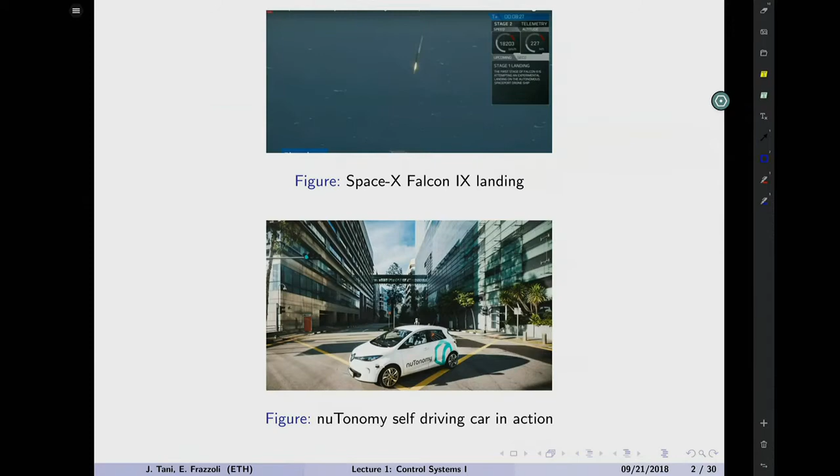So, what is Control Systems? Why is it important? Why is it amazing from my perspective? These are all things we're going to discuss throughout the course. I'd like to start with two simple videos to show what control systems is all about. Up to now you've studied math, physics, building bridges, or figuring out practical stuff where it was very clear what you were doing. Control systems typically isn't always appreciated because it's a bit more subtle. So let's see what control systems allows us to do.

And for deep space exploration tomorrow. What you can see here is pretty straightforward: it's a rocket launching, which is amazing on itself. You might ask where the control systems is going on here. Control systems is what allows it to operate nominally, to actually do what people want it to do. The launch is something you might have seen many times, but this video is particularly amazing because look at what they managed to do—they actually managed to land the rocket back.

If any of you think that's easy, have you ever tried taking the stick of a broom and balancing it in equilibrium on your hand? If you close your eyes for 5 seconds, you won't be able to do it anymore. Now imagine if that broom is thrown from the skies and it's like 300 tons in weight. I try now to handle it, and let's see how you do.

So control systems is one of the things that allows, for example, these things to happen. One of the properties of this subject that fascinated me as a student your age is how powerful it is—how it can be applied to such a broad variety of topics. I'm sure 95% of the things you use daily have plenty of control systems embedded in them, and you probably don't even know it. This is just another application among the many we could mention.

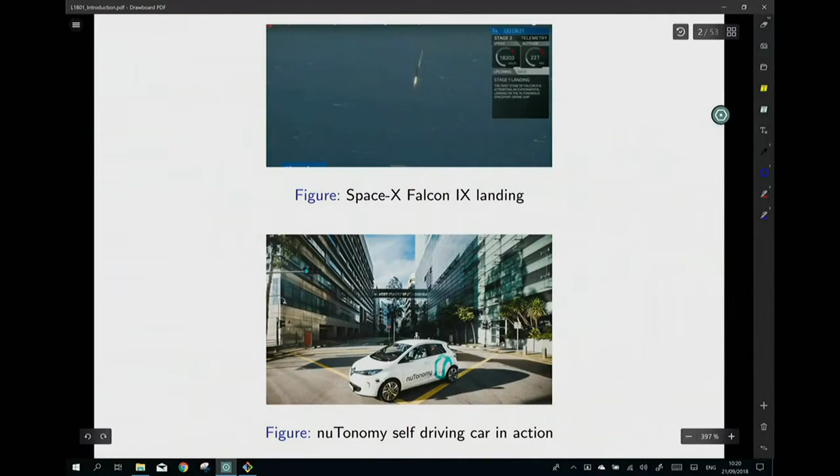So you think we can apply control systems only to rockets and cars? Well, no—control systems is pretty much all over the place. It's in the heating systems of your houses, in biological systems, in networks, in aerospace as we've seen, in robots, in financial systems. You can apply control systems wherever you want, and the theory you use is always the same. The math complexity is roughly high school level, at least for Control Systems 1. That's one of the beautiful things about it: it's easy to treat yet so powerful, broadly applicable to many different fields.

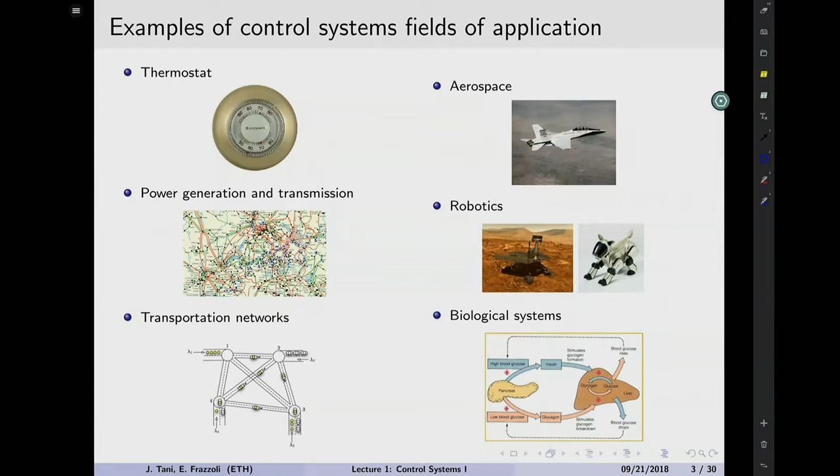So it's often referred to as the hidden technology—something you never hear about, yet extraordinarily successful. Without control systems, we couldn't operate all the things around us the way we do. How many times have you heard of control systems before getting in this room or reading about it in your studies? Raise your hand, you know what I mean. Okay.

You hear about it a lot when things go bad, when disasters happen. It's often because the control system stopped working, because a sensor stopped doing its business, because there was some weird situation that happened in the computer program that had to make things happen.

So what are we going to do today? Of course, we're going to start with the boring things, with logistics, an overview, how this works, how the exams, the people, and all of that. We'll actually start from the course objectives, my bad. And then we'll go into the logistics and then start with a little bit of the meat of what we're going to be treating throughout the course.

So this course is about controls of what? What does controls mean? It means getting something to do what you want it to do, as opposed to what it would naturally want to do.

What is this something? The something is dynamical systems. So what are systems, right? System is a very broad word. In common language, you can use it to say the system is what doesn't make you get a job, or is what rigs the game of your favorite soccer team, right? No, that's not the kind of system we're going to be dealing with.

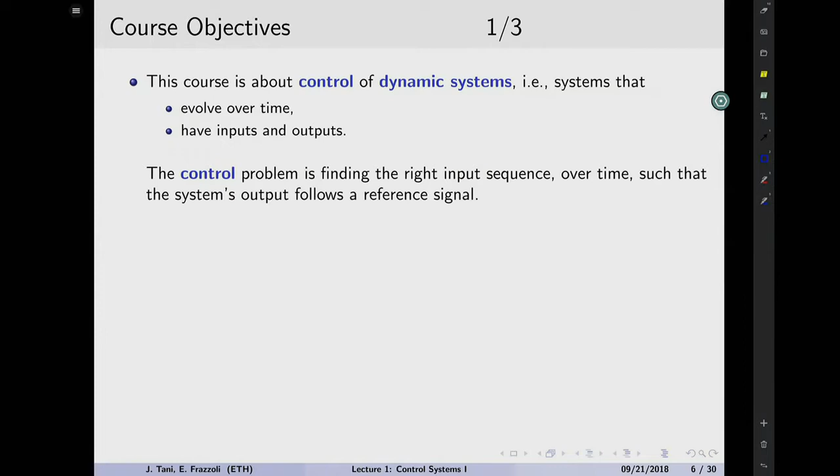So what is the control problem? We know pretty much what a system is—we'll go in plenty of detail about this throughout the course. What does controls mean? Controls means finding what is the right sequence of inputs, because input is something typically that we can do something about, so the user can control, can modify. Trying to find what is the right control sequence such that the output of the system, which is what we care about, behaves in a way that is desirable to us—so follows some signal that we call a reference.

So how do we achieve control? What are the steps, the milestones that we'll have to go through in order to be able to do this magic thing of controlling systems in the way we like?

We will have to first study modeling. Modeling is about describing, creating a mathematical representation of a system. Things in nature happen all the time, and most often than not, what really happens is either beyond our understanding or way more complicated than we care to describe. So models are something that we create, and they're mathematical representations of reality. The model itself is not reality—it's just that everything goes as if it was described by those equations as far as we care. We'll go into this later in the course, but the general takeaway is that every time you make a model, you're always making mistakes. All models are wrong, but they're useful—often they're useful, and they're very useful in control systems. So we'll learn how to do some modeling.

Then we'll have to go through the milestone of analysis. What does it mean? Analysis is understanding how systems work—in the sense, if we stimulate a system with some input, whatever the input is, depending on the specific system, how does the output behave? If we design some sort of logic, some sort of black box magic thing that manipulates the input in a certain way, will the output respond in ways that we like? How does it work? How do we quantify the performance and the relationships between inputs and outputs? That we call analysis, and there's a full set of tools that we're going to introduce in order to be able to do this.

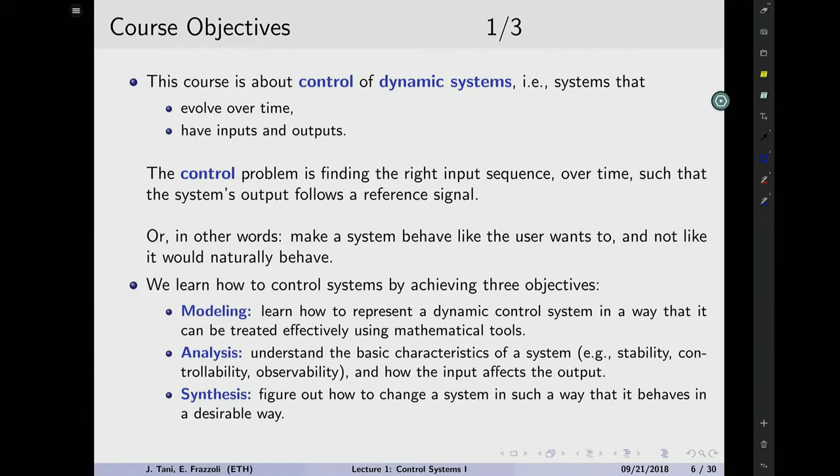So we'll get into this later, but the idea is that in this course, we will focus on systems that are described by ordinary differential equations. I'm sure you all know what ODEs are, correct? Yes? I would like to see more enthusiastic hands. ODEs are your bread and butter. If you don't like ODEs, man, you might be sitting in the wrong place. Want to consider that when you go home.

So we're going to be talking about classical control in the sense that, as I mentioned before, and as will be much clearer throughout this class, we're going to be restricting the scope of what we study to something very particular, to a class of systems that, if you want to be picky, is like the subset of the subset of the subset of what is really going on in the world. And one can argue, okay, but why is it useful? Typically, every time you talk about something that already has 3 or 4 adjectives in front of it, it means it's so particular, so specific, that how can it be relevant?

But actually, the key element is that this is a subclass of systems we're going to be describing. They're called linear time invariant systems. They are a good enough approximation of pretty much everything that goes on in the world. So as long as we keep in mind that we are committing a little bit of a mistake in approximating what is going on, even the most complicated of things can effectively be treated through this simple linear time invariant subset of whatever it is.

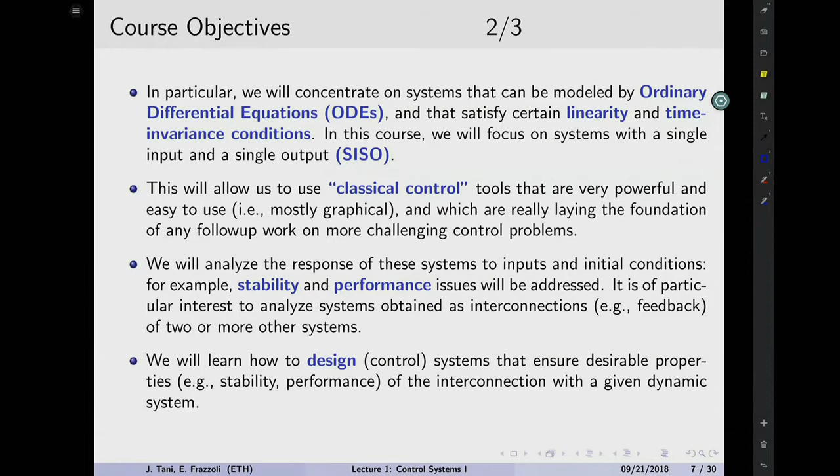And why is it cool? It's cool because linear time invariant systems are mathematically so easy to treat, and we can really play around with them as much as we want. Some of the important things we'll go through are determining how to stabilize and find out the performances of the system - these are all keywords we'll see later on - and how to design controllers to meet whatever our design objectives are.

So one of the things you will notice about this course, and I think personally this is one of the, say, 4 or 5 big secrets of engineering. You could summarize all engineering in 4 courses, basically in 4 topics, and this is one of those things you really want to know. It's the Laplace domain, it's Laplace transformations, it's the frequency domain, okay?

We will see how useful it is to represent all the dynamic behaviors we're going to be studying in this thing called the frequency domain, that maps one-to-one to the time domain by a transformation called the Laplace transformation. And this is kind of counterintuitive. It's not something you can get a feeling for unless you've got lots of practice. This typically represents one of the biggest hurdles to students studying control systems for the first time, because quite immediately you lose the physical sense of what's going on.

But nonetheless, the frequency domain really is one of the secrets of engineering because it opens the door to what really is going on in dynamical systems, like the relationship between inputs and outputs. So it's perfect for what we're going to do. But throughout this course you're going to start thinking, hey, what the hell is it that I'm doing? All these calculations, how are they relevant? How do they matter? How can I do something useful out of it? So if panic starts creeping in, keep calm and follow the rules, because it's nice that we can really do step-by-step procedures for most of the important stuff we're going to be talking about.

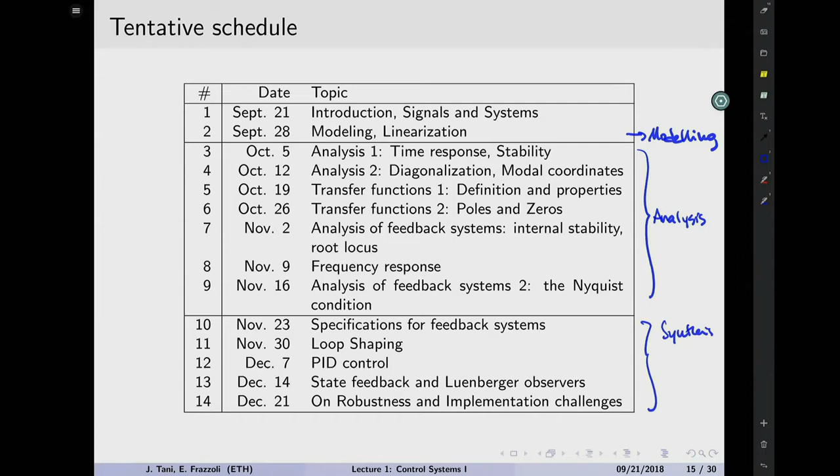And then we'll go a little bit more forward, and we're going to be studying how these systems behave when they are connected to each other, and how can we influence them in an efficient way. How can we leverage the properties they have, or maybe how do we cancel out the bad properties they have, and replace them with something that allows the systems to be controlled, that is, to behave in the way we want them to behave, rather than how they would naturally behave. Towards the end of the course, we'll touch upon some of the more advanced topics, the stuff that you will see in future courses in control systems, if you attend them. Things like robustness and challenges of implementations.

So now we're going to move into some of the more interesting topics. At the end of today, you should be able to understand what is the approach of the discipline of control systems. That is, this idea of seeing everything as blocks with inputs and outputs, and understanding how to classify systems, what systems are, and how can we describe them at a very broad level, and then we'll pick out of this broad classification what is actually of interest to us, so we understand what's the scope of the course.

You should be able to describe what an input, an output, maybe the state... No, we're not going to be talking about states today. Of some practical examples of systems. You should be able to describe what a control system is to another student and why they should rush and join this course.

You will be able to describe some of the more technical properties of systems, which we will see later on, and be able to calculate and at least understand the influence of different interconnections of systems. So what happens if we take system A, system B, put them together one after the other in series and

parallel, or in this magic configuration that is like the key to solving all the problems of control systems, which is called feedback, like the famous feedback loop. It's all about controls. Our proud trademark is the feedback loop. And you should be able at the end of this class to describe the difference between a single input, single output system versus a multi-input, multi-output system, SISO versus MIMO.

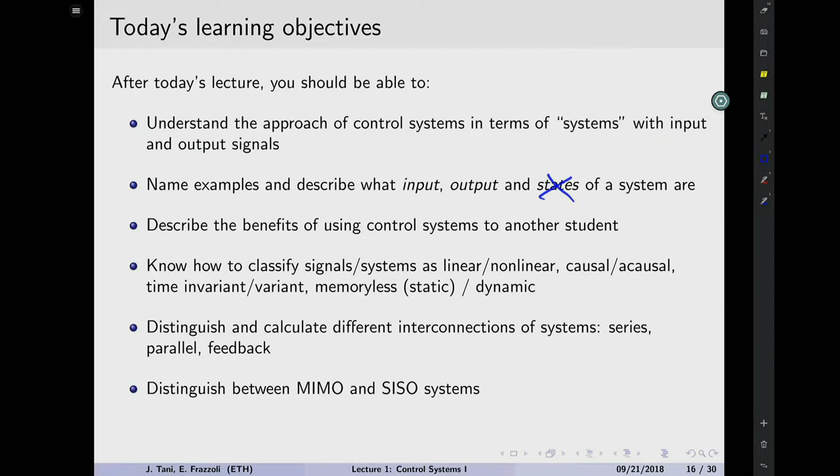Okay, so let's get started. What is a signal? So are there any questions up to now? Before we get a little bit more into technical stuff. Any questions regarding why control systems is useful? Why in the world should you be sitting here? Apart from because it's mandatory for you, of course. Anything related to the organization of the class?

Yes, no, maybe? I get it, you're on camera, but really don't be shy. It's not worth it. Nope, okay. Any questions from you guys? No? Okay, so let's get started.

Signals. We really are at the point where all we want to get out of this class is imagine the world as a block, okay? And every subset of the world is a different block. Control systems like seeing blocks with arrows that come in, arrows that go out. What comes in is an input signal. What goes out is an output signal. What stands in the middle is a system. What is a signal? Let's start by describing inputs and outputs.

So a signal is a function. It's a map. It's a mathematical relationship between two sets of numbers, okay? So basically, a signal is something that you throw a number in and it produces a number as an output. We'll call the numbers that you throw in the signal, let's say the set T, and the output is going to be from some other set.

Now, depending on how we imagine this set T, it's called T because you can imagine it as time, although it could be anything else. Let's imagine time goes by, your input signal is something that changes in time. So if we imagine this time axis to be continuous, what you get is a continuous time representation of a signal. And that's the approach we're going to be following for most of the class. Why? Because continuous time is our favorite way to model the world. Things that happen in nature happen in continuous time.

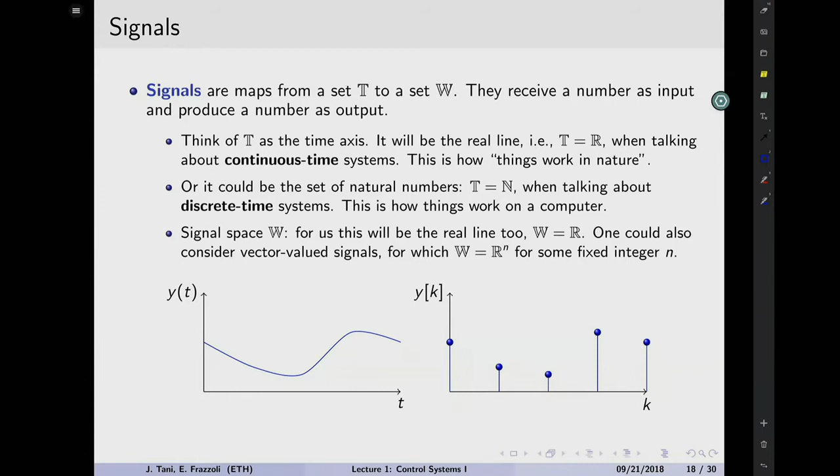So what is a system instead? Wait a sec, I forgot to mention something. No. So a system, what's a system? A system is instead a map between signals. Okay, so we said a signal is something that gets a number in and produces a number out. A system, at least we'll call these input-output models of a system, is something that transforms an input signal into an output signal. Okay, so what are input signals? So the inputs are, again, something that you can think of as something you have control over.

You get to choose the input. If you have a ball and you're kicking the ball and the ball goes somewhere, well, you get to choose how much force you apply to the kick, where you want to hit it, what's the curvature you want to give to the ball. It's something you have control over.

And the output is just subject to the laws of physics, what ball you're using, what's the weight, what's the environmental condition, is there wind, is there not, and the output is going to be a function of how the system, that is everything that has all the laws of physics that have an effect on the process,

how this system operates on your input, and that's the objective of our course, trying to figure out what are the best inputs so that we get the outputs to be something we like, that we can predetermine.

There are going to be other key signals that we're going to mention throughout the course, some things called disturbances, noises, and these are always inputs to the system in a broader sense, but are inputs that we cannot control, inputs that come from sources that are beyond our reach.

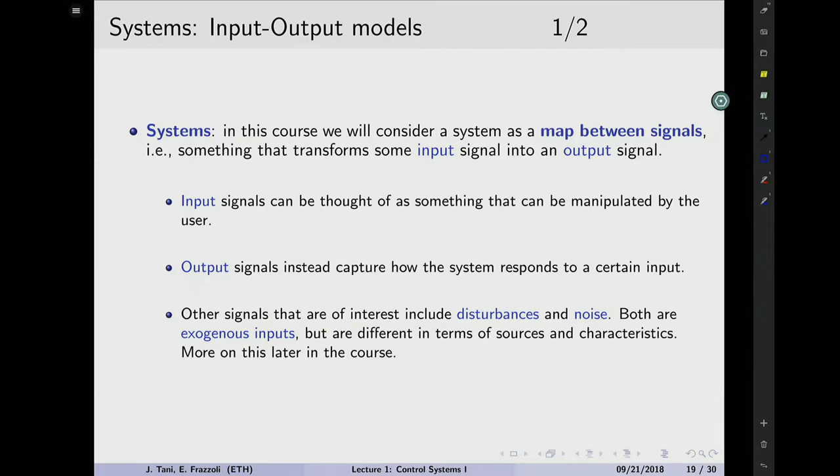For example, if you're using a thermometer to measure something, or like a thermocouple, an electrical sensor of temperature, there's going to be all the particles moving inside of the copper wire that are going to create some high frequency. There's nothing you can do about it. You just have to deal with it, okay? Disturbances instead are typically more low frequency things, but we'll get into the details of all of this later on.

So what is an input-output model? This is fundamentally going to be your best friend in this course. This is how we see a system. It has an input signal, which we will call U, or an input signal that changes in time, so U of t, and it will go through the system. The system, for now, we will represent as this sigma function.

As the system operates on the input, so the system is like a monster that chews stuff. The input that comes in goes inside, gets modified by the system map to produce what we call an output. So this is the signal that is produced by the effect of the system, represented by the sigma transformation on the input signal U. And of course, the output is a function of time, because as you change the input in time, the output would change as well.

Now we're going to describe a little bit more what systems are. Depending on what the relationship is, the sigma, how it manipulates the inputs to become the outputs, we will broadly classify them in 4 different categories that are relevant to us in this course. First, we're going to talk about static or memoryless systems versus dynamic. We're going to talk about linear and nonlinear distinctions.

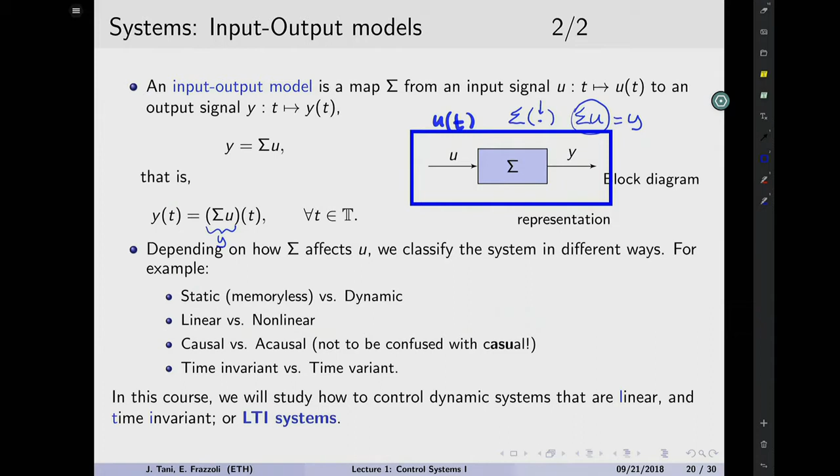Why do we introduce all of this? Well, because this is preliminary work for defining the scope of the course. What we care about and will study are linear time-invariant systems: systems that are linear as opposed to nonlinear, time invariant as opposed to time variant, and causal, not anti-causal. And of course, our dynamic systems.

So let's get started. We have 10 minutes before the break, so let's first get into the distinction between a static and a dynamic system. So what's a dynamic system? Well, you can imagine a dynamic system as something that changes in time.

Even a static system changes in time. The difference is this: suppose this is the input signal that changes in time, and we are at the present. At this particular moment in time, the input signal has this value A, which could be any number, 1, 2, 3. So we send A inside, the system reacts to this number and produces an output at that specific time instant called B. This is happening at a specific time instant in the present. Let's suppose time t is now.

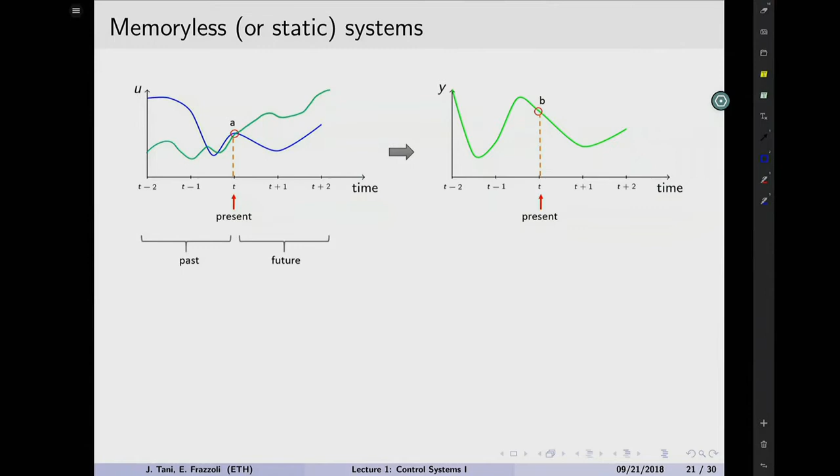In a static system, if we change the input signal, but at the present it still has that particular value, then the output will change, but at the present the value is going to be the same. So another way of saying it is that in a static system, only the present input value affects the output. There is no effect of the past. That's why it's called memoryless, because the system doesn't have to remember anything that's been going on in the past of the input. The output only depends on the present value of the input.

So basically, you can forget anything that goes on anywhere apart from now in a static system. Any questions about this?

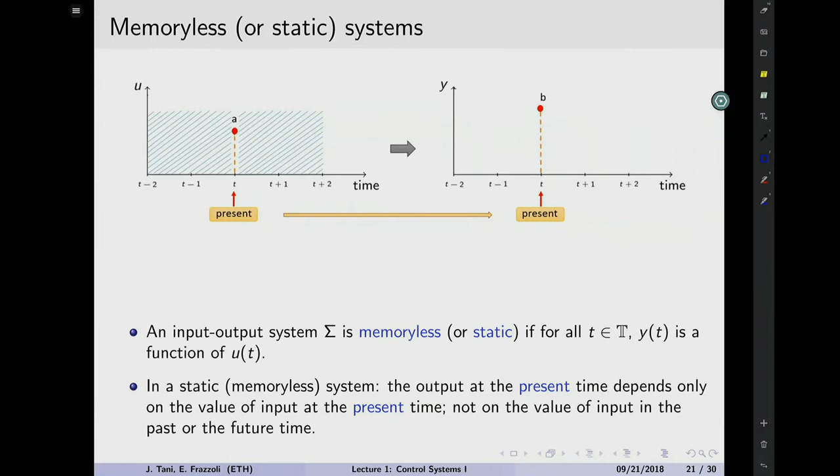So there are some examples. Might be boring for some of you, but let's just start slow. Let's go through maybe 1 or 2 of these things. So what did we say is a static system? A static system, the output depends only on the present values of the input. Be careful. Let's look at this thing.

Y of t is equal to 3 u of t. Let's pretend we get t equal to 0. You've got y of 0 that is equal to 3u of 0, right? If this is the present, the output at the present time 0 is affected only by the input at the present time 0. If we were to get a different value, t equal 5, we will get y of 5 is equal to 3u of 5. It's not really a rigorous way of doing it, but you can tell that whatever time instant I choose, the present output will only depend on the present input. Does anybody disagree with this?

Yes, no, maybe? No. Let's look at the next example. This is a little bit more tricky, because when you think about static systems, you'd say as long as I only see u of t on the other side and t doesn't appear anywhere else, then it's static, right? Not really. For example, if t equal to 0, you've got y of 0 equals 2 to the minus 0 plus 1, times u of 0. If I use another value, y of 3, this becomes 2 to the minus 4 times u of 3. So you see there is time here that appears outside of the input, but it's a coefficient, okay?

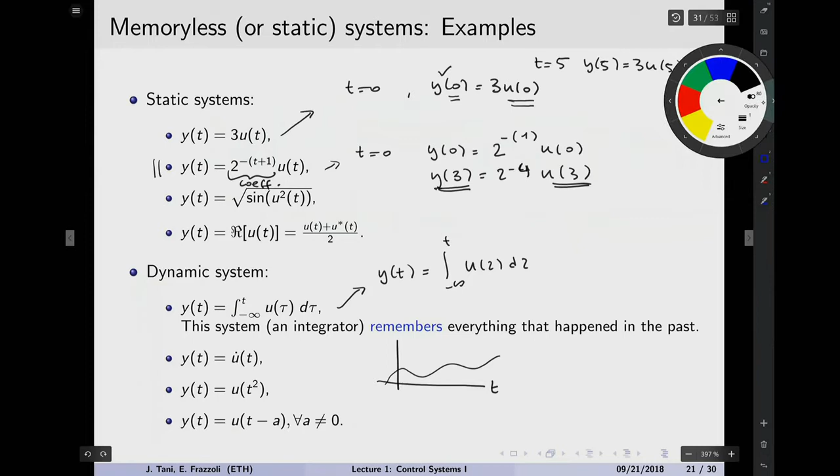What about the derivative operator? If you have y of t equal to u dot of t, is that static or not? What's a derivative? Imagine this is time, you have some signal here. If you are doing a derivative, what you're really doing is calculating a slope at some specific point. A slope is a line, and a line needs at least 2 points to be well determined. So whether you choose the point to be at the present and one in the past, or one in the future, there are different ways of calculating derivatives. The bottom line is it doesn't depend only on what's going on in the present. You must have some other piece of information, otherwise you cannot well define a slope. So definitely a differential operator is not static, it's a dynamic operation.

Here's another interesting example: y of t equals u of t squared. What does it mean? It means you take time and apply some kind of operation on it, some sort of time scaling or time manipulation. If you do y of 0, this depends on u of 0, so present and present, perfect, it's static. If you do y of 1, this is u of 1 squared, which is always u of 1, so again static, present output, present input, no problem. But if you try another number, like 2 or some negative number, you get the gist of it, this will no longer depend only on the present value of the input. So if you do any sort of time scaling, you will not get a static system.

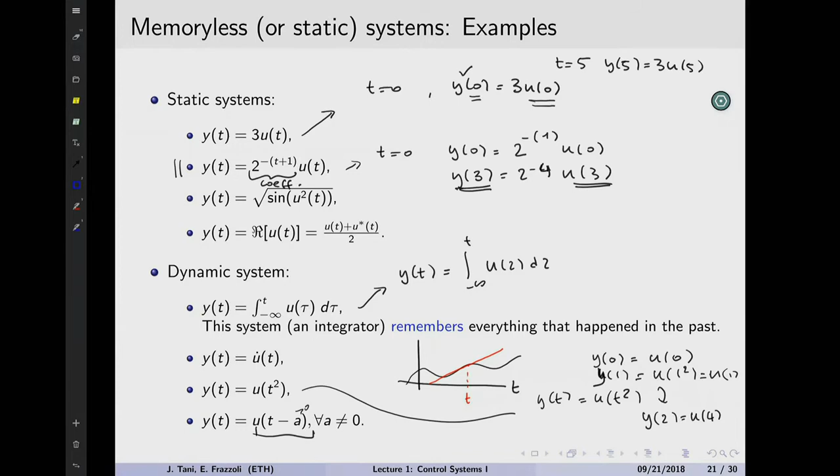We've just finished looking at the difference between static and dynamic systems. And really, the core idea is that a static system has an input-output relationship that depends only on the present, that is, the output at the present, now, at time t, depends only and exclusively on the input at the present time t. Anything else is dynamic, okay?

So now we can talk about the distinction between causal and non-causal systems. And it is very important, and it's very much related to static and dynamic. So what is a causal system?

A causal system is a system that makes sense. This is not a technical definition, okay? Makes sense, what does it mean? It means that it follows the principle of cause and effect, like the effect follows the cause. If I kick the ball, it moves. The ball doesn't start moving before I kick it, okay?

So the way we can say it is that a causal system is a system where only the past and the present of the input affect the present output, but not the future. So a causal system is a system where the future does not affect the present. It's fair enough, right?

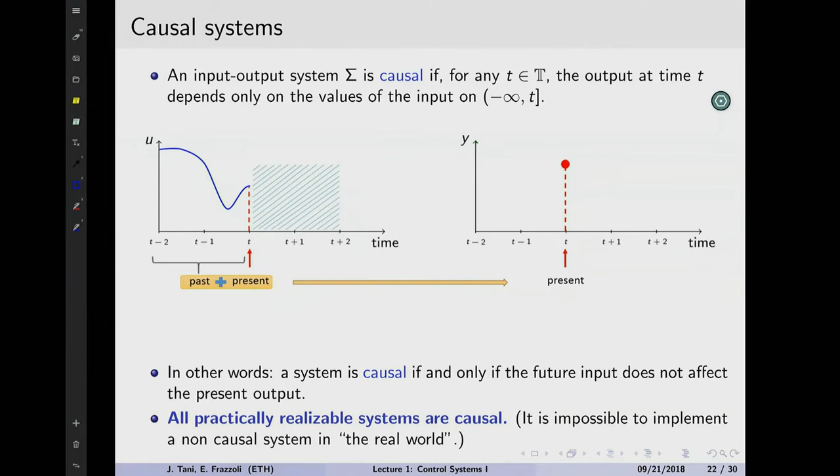In a more mathematical way, how can we represent this? We introduce an operator, a transformation, a truncation operator. What it does is truncate - it sends to 0 everything after a certain time instant. We choose the time instant to be the present, time t, or some time. As you operate the truncation operator on an input signal, you're setting the input signal after that specific time to 0. Why is this useful?

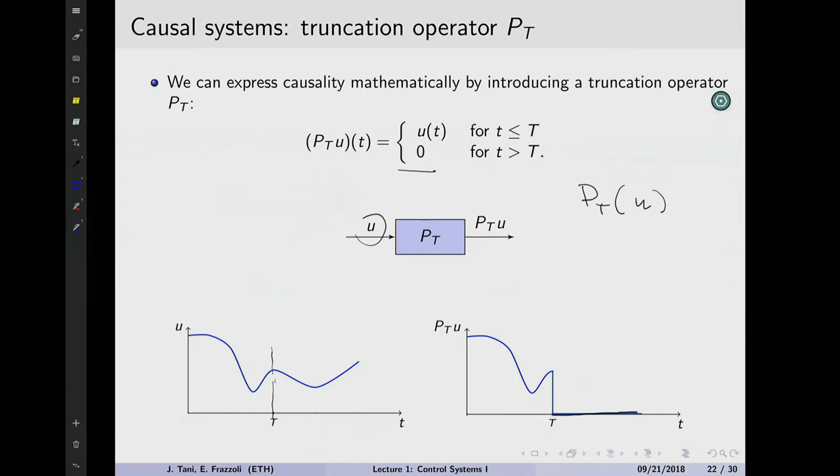Well, because causality is about the future not being able to affect the present. So basically, if we translate this in a more mathematical way, what we're saying is that if you take a signal, an input, and pass it through the system, you get the output, and then you take away from the output everything that belongs to the future - that's exactly the same result as if you were to take the input, before passing it to the system, remove anything that has to do with the future, then pass it through the system, you get the same output as before. When this relationship applies, a system is causal. So basically, it's the same thing if you remove all information regarding the future from the input before or after it passes through the system.

But this is not going to be very useful in practice. The fundamental idea of causality is that the future does not affect the present. And we call a system strictly causal if only the past affects the present - not the future, and not even the present affects the present output. This is something that in practice is quite common.

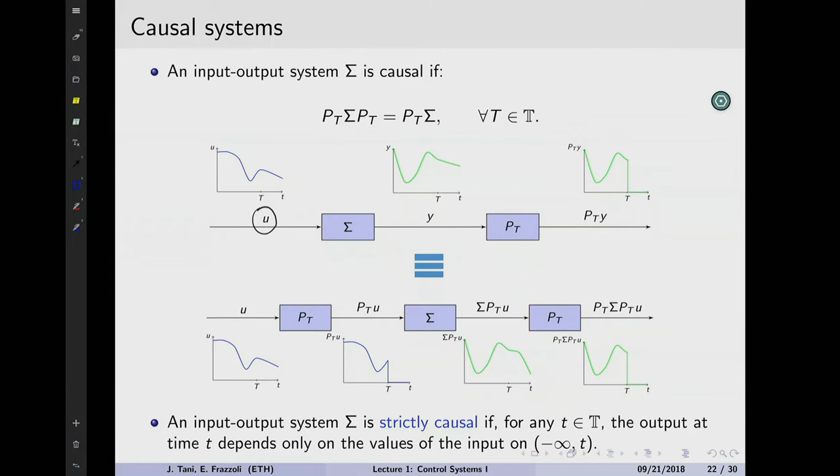So let's do some examples. Remember that all realizable systems, all stuff you can actually build, are causal systems. So of course, y equals to u is a causal system. That's trivial - plug in any time instant, the output only depends on the present. So it's causal, it's not strictly causal.

Now let's look at the second example. We talked about this before. Let's say you've got the input, but it's translated in time. So what does u minus tau mean? This is a system with a delay if tau is bigger than 0. Let's talk about it a second. Suppose we have the time axis here, and you've got a signal that is 0 up to here, and then it goes whatever. This is u of t. And you've got, let's say tau is equal to 1.

I don't know, just to put in a number. And what does it mean? It means that y at time 0, for example, is equal to u at time 0 minus 1, which is u at minus 1. So the output at this instant in time is actually equal to u minus 1, which is here.

So it's as if you're taking the input signal and you're translating it and you're looking at what happened in the past. So when you subtract, you translate the time axis by a positive number, what you're doing is you're actually implementing a delay. And delays are really, really common in real world applications.

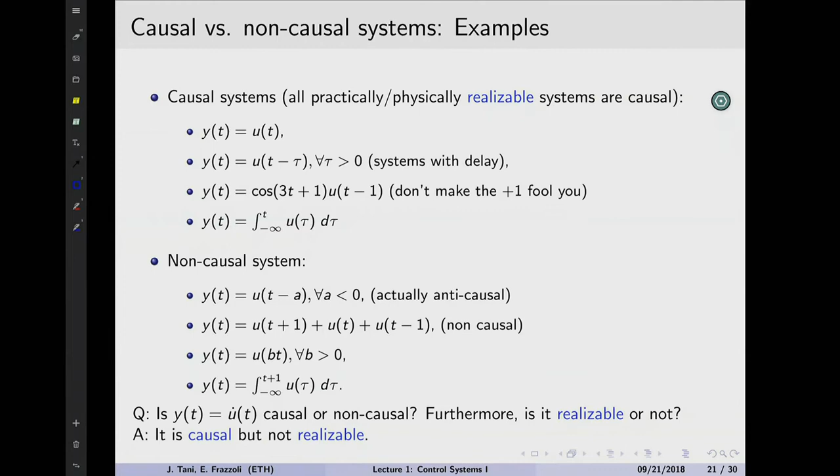So if you were to measure the derivative of a noise - this is one of the biggest takeaways of the whole course, one thing you want to remember: never take derivatives of noisy signals - the idea is that this derivative could be infinite. So there are ways to approximate derivatives, but you cannot actually calculate the derivative exactly. You can do very close approximations, but not calculate it exactly.

Now we get to this other idea, which is the idea of time variance versus time invariance of a system. So what does this mean? You can read the definition there, but I'm trying to come up with an example that is intuitive.

Suppose it's not a great example, but suppose I go and operate that door - I want to open it and close it. If I give the door an input, like I push it, it's going to swing in some way. If I wait 5 minutes and push it again, it's going to swing in the same way. If yesterday I came here and pushed the door, it would have swung the same way. Maybe in 100 years it won't be the same because the screws and springs will die off, but suppose it's an ideal door where the components never break down.

That would be a time invariant system. So a system is time invariant when the relationship between the input and the output does not depend on the time of day you use it. It doesn't depend explicitly on time.

More formally, we can consider the shift operator, which we described before - basically take a signal and translate it in time by a factor tau. If tau is bigger than 0, we call it a delay; if tau is smaller than 0, you're anticipating the signal. If we define the shift operator sigma tau, shifting by a quantity tau, all you get is the signal at this time instance minus tau, where tau is any number you want.

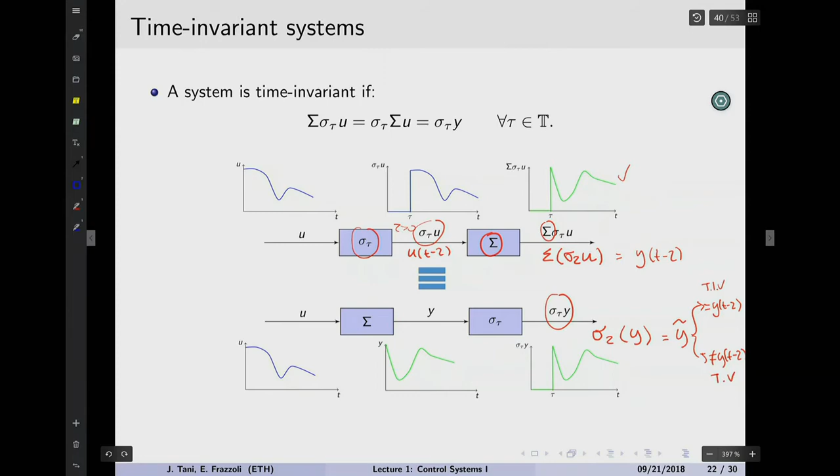Time invariant. If this is not equal to y of t minus tau, it means that if I operated the system before or after, the output would have been different. This is time variant. Let's look at some examples. So, for example, let's take this system here. Here there are some nice properties that we can extract so that when somebody might or might not ask you these questions in a final exam, you kind of don't need to do the calculations. You extrapolate. Once you understand the properties, you can crank things through a little bit more quickly.

Okay, so let's apply the trick. So what's the trick? Let's repeat it here for a second. Let's say we have an input signal, okay? And it passes through a shift operator of tau delay. And you get u of t minus tau. Then you pass it through your system, and you get y of t minus tau.

Now suppose you take the same input and you pass it instead through the system first. So what we're doing is we're flipping these two systems. And what you get is the system applied to u. And then you shift it, okay, of the same quantity tau. So what you get is sigma tau applied to this. Now, if this is equal to y of t minus tau, we've got time invariance. If not, so this is different from y of t minus tau, we got time variance.

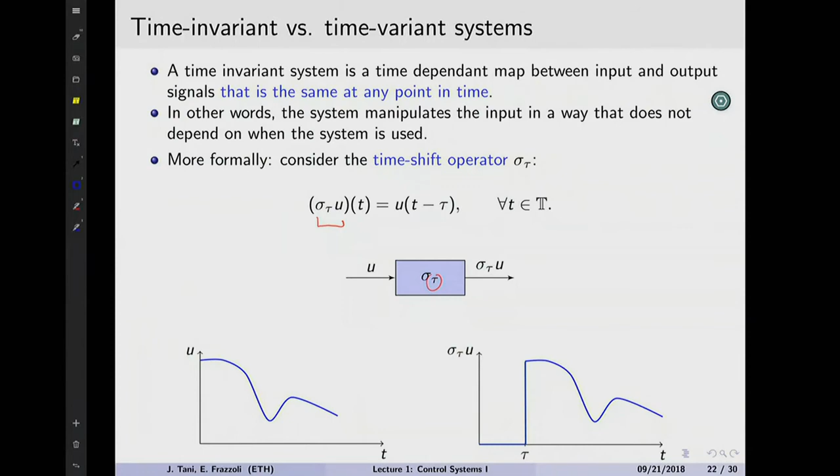So let's calculate these two cases here. So let's call this path 1, let's call this path 2. Let's do step 1 first. So you got an input, u of t, you pass it to the time shift. So what's the time shift operator? The time shift operator is something that if it's applied to u of t, it produces u of t minus tau, right? This is the definition of time shift. It's what we said before. If you apply the time shift to u, whatever was in the argument of u, that is t, becomes t minus tau. You add a term to it.

So in this case, what we're sending in is u of at, right? So because at is a little bit confusing, let's call this something else. Let's call it, I don't know, k. Okay? So what we're doing is we're taking u of k and we're sending it through the shift operator, right? So this is exactly as the definition before. What we get is u of k minus tau, right? Anybody disagrees with this? Am I making mistakes? Oh, good. Okay, now we get this u of k minus tau. And this is actually what? This is actually at minus tau, right? Because k was equal to at.

Now we take this and we pass it through the system, right? So if we're passing it through the system, what are we doing? The system is taking the input and it's multiplying the time by a. So let's call this, just to make it easier and similar to the definition of the system we have here, we can call this, I don't know, n. So the output is going to be what? The output is going to be y of a times n, which is equal to a squared t minus a tau.

Now, let's instead do the opposite thing. When we do the opposite thing, we take u of t, we pass it through the system, and what we get is y. How is y defined in this case? What is the nature of the system? Here the system is taking u at some time and it's dilating time by a. So you get u of t, and here you get u of at. And this would be the system applied to the input.

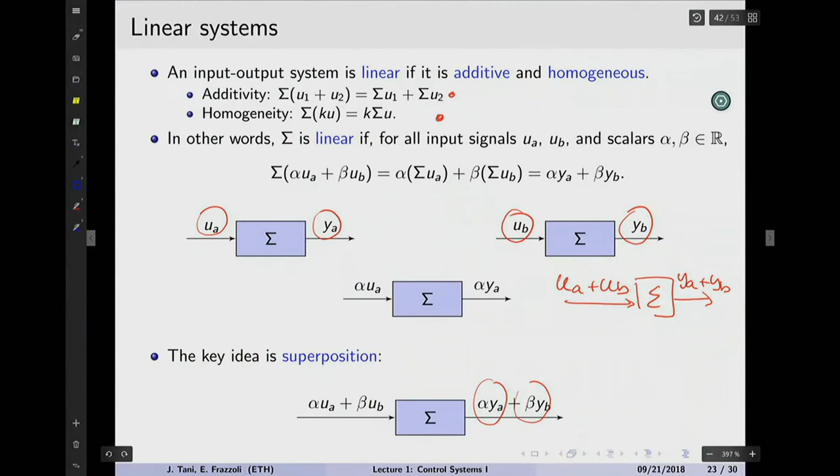So how can we see this? Well, the way we see it is by checking these two properties, the property of additivity and the property of homogeneity. So let's see. Choose one. This one is interesting. It seems very easy, right? We've got y is equal to u plus a number, where a is any number, I don't know, a positive number. A may be bigger than 0, real. So let's check the two properties. First, we check additivity.

Remember, additivity means I send in a signal, let's call it U1, through the system, I get Y1. Then, independently, I send U2 through the same system, and I get Y2. Then, it's additive if I send in U1 plus U2 and get as an output Y1 plus Y2. And the other property is that if you send U1, you get Y1. If instead you send U1 multiplied by some number, what you get is the output multiplied by that same number.

So let's see, for example, here. If I take U1, the output is going to be Y1, which is equal to U1 plus A, right? If you take U2 as an input, the output is going to be Y2, that is U2 plus A. Now, if we send in the sum of the inputs, which is U1 plus U2, you get as an output what? You get U1 plus U2 plus 2A, right?

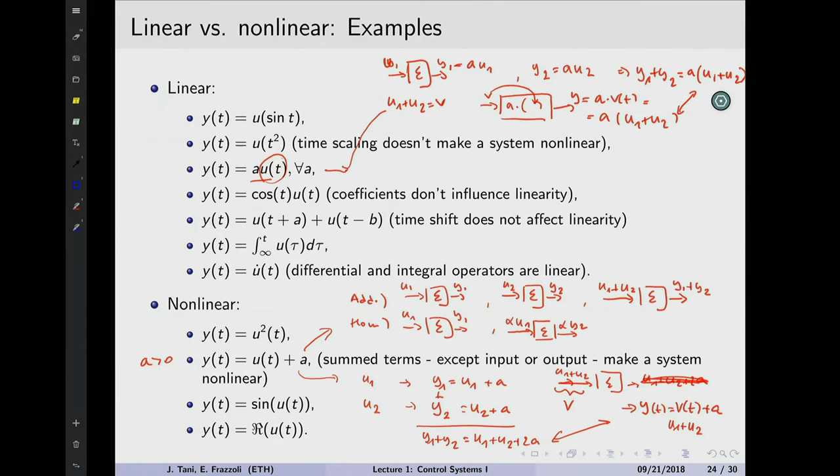So in this case, they're not the same, okay? And if you try the other property, that you scale, you'll get the same. So this is a nonlinear system. You should try all these other examples at home, so you get some practice with these things. But here you have a list of linear and nonlinear. So we're done with all the mathematical properties that are of interest to us in describing systems.

So why did we do all of this? We did all of this because in this course, really what we're going to talk about is linear time invariant systems that are single input, single output, and are causal, okay? So all of this was done in order to give you an idea of the scope of the course. That is, what we're going to be treating, and how does it fit in the bigger picture? It fits in the sense that, really, we're doing a detail of a detail of a detail.

Actually, most of the systems that are in the real world are nonlinear, for example. Okay, well, we're going to be studying linear systems. So why are we even doing it? Why is it worth our time, right? It's worth our time because, as we will see in next class, linear systems can always be used as local approximations of nonlinear systems.

So linear is a very specific thing. We just described what it is. Linear is a system that respects a specific property that we can write down, okay? Nonlinear is everything that does not respect that property.

Linear is something you can put a nice circle around and define. Nonlinear is the rest of the world. So the point I'm trying to make is that there's a broad variety of different nonlinearities. When you say linear, you say something specific. When you say nonlinear, it doesn't really mean anything. You have to specify what is nonlinear.

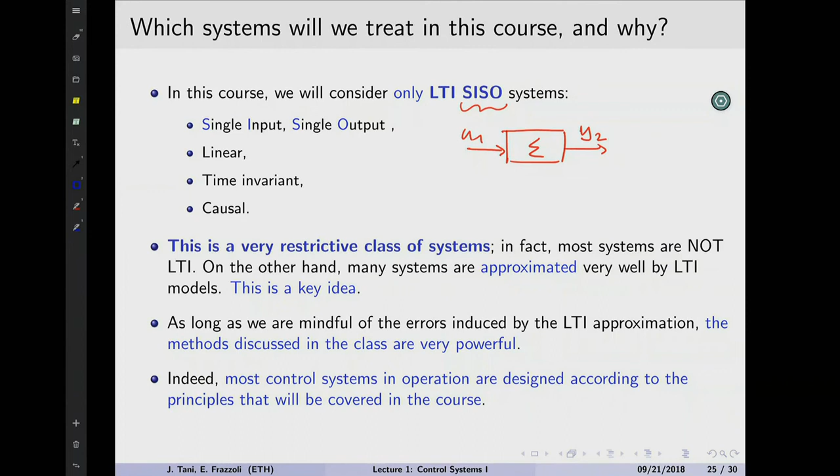Guess why? But we'll restrict our analysis to SISO systems. MIMO systems is something you'll study in Control Systems II. And fundamentally, all the ideas that apply to SISO systems kind of apply in MIMO systems as well, with some extra complications and spices on top. But I'll leave that to next semester.

So now we understood what we mean by system a little bit more. We still didn't specify exactly what kind of systems, or how this thing is practically useful. But we reduced the scope. We removed infinite systems that we don't care about. Now we're going to care about linear time invariant systems.

And what happens if you take a system and hook it up with another system? You do interconnections of systems. What does it mean? Suppose I send an input to a system, first a system sigma 1, and you get as an output, we can call it y1, which is equal to sigma 1 times u, right? Now the serial interconnection is when the output of this first system becomes the input to the second system. So the final output, y, is what?

It's sigma 2, so let's pretend. So the output of the first system is equal to sigma 1 times u, right? And since this is at the same time the input to the second system, let's call it u2. So y is equal to sigma 2 times u2, right? This is like what we've been seeing up to now. But u2 is equal to sigma 1 operating on u. So this composition of two operations, now it seems a little too theoretical and abstract, but later on it's going to become a bit more clear. The idea is that you can substitute—how do I do this?